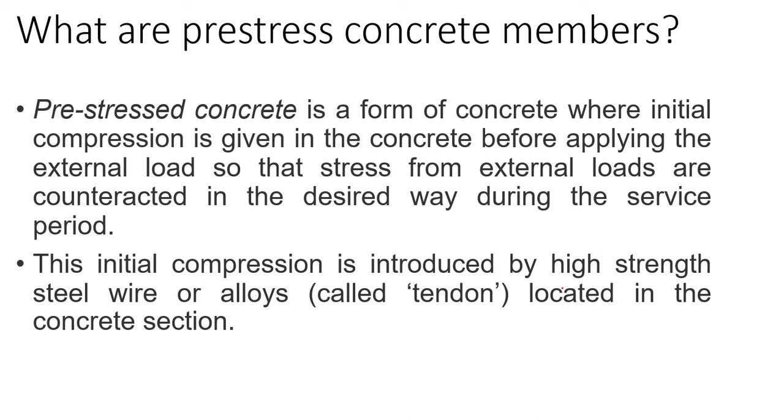This initial compression is introduced by high-strength steel wires or alloys, known as tendons, which are located in the concrete sections. Now, why is pre-stressed concrete required? We know that concrete is good at compression but very weak in tension.

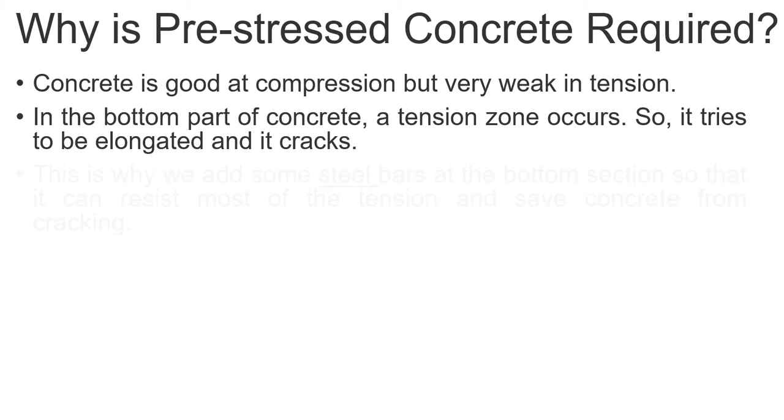When any external load is applied, a tension zone will occur in the bottom part of the concrete. It will try to elongate, and guess what? It will crack. This is why we add some steel bars at the bottom section so that they can resist most of the tension and save the concrete from cracking. This is our traditional RC structure.

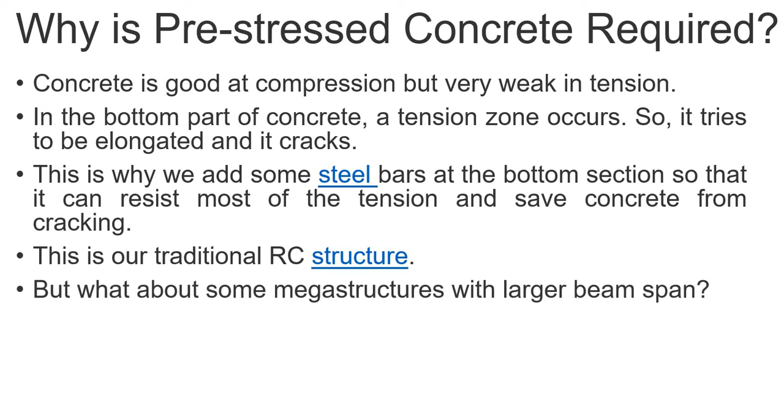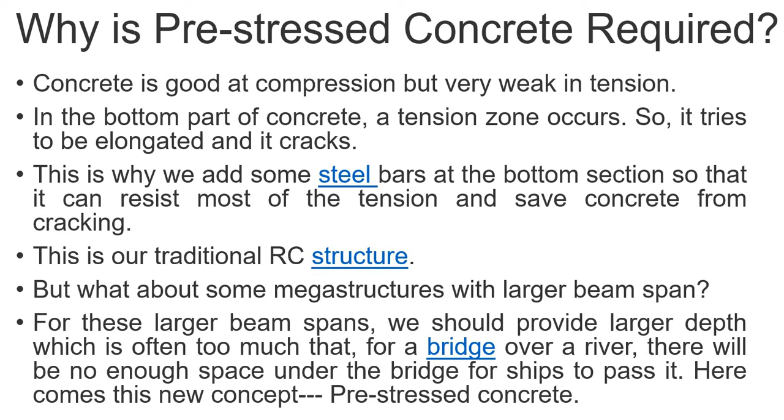But what about mega structures with larger beam spans? For these larger spans, we should provide a larger depth, which is often so much that for a bridge over a river, there will not be enough space under the bridge for ships to pass. Here comes the new concept, which is pre-stressed concrete. So now we understand why we require pre-stressed concrete.

Next, we have to know the methods of pre-stressing, because there are two methods to pre-stress concrete. The first one is pretensioning. In this method, the tendons, or group of wires, are pulled between two end bulkheads prior to casting. This pre-stress is later transferred to the concrete due to bonding. Pre-tensioned concrete members are those in which the tendons are tensioned before any pouring of the concrete. The tendons are initially tensioned and anchored at both ends, and then concrete is poured over them and cured.

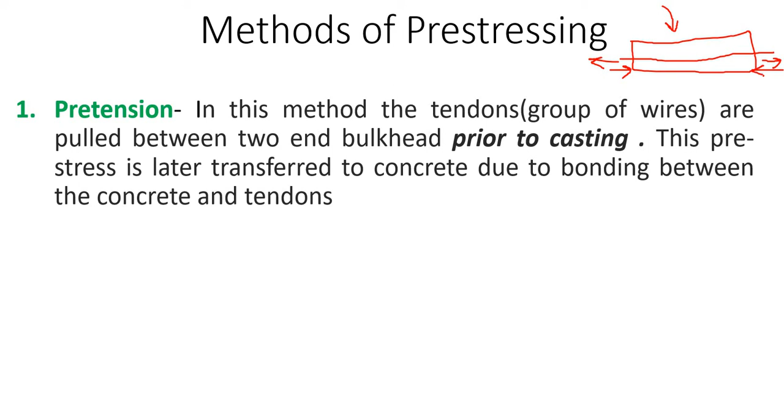Suppose this is a beam, and we have placed a tendon here. In pretensioning, before the concrete is poured and cast, we pull the tendons from both ends, give tension to the tendons and anchor them at both ends. After tensioning and anchoring, we pour the concrete and allow it to cure. When the concrete attains its desired strength, we release the anchorage, and the pre-stressing forces will be developed and act on the concrete. So this is the pretensioning method.

Now, what is post-tensioning? In this process, first the casting of the structure is done and later the tensioning is done, which means in post-tensioned concrete, the tendons are tensioned after the concrete is poured. Unlike pretensioning, where we pulled the tendons before pouring the concrete, in post-tensioning the concrete is initially cast around the sheathing.

Here will be a sheathing. In post-tensioning, the sheathing forms ducts in the concrete in which the tendons are placed. After the concrete is poured and hardened, the tendons are tensioned by hydraulic jacks and anchored. In the case of bonded tendons, the duct is grouted with cement slurry.

So these were the methods of pre-stressing: one is pre-tensioning, one is post-tensioning. In pre-tensioning, before pouring the concrete, the tendons are brought under tension, but post-tensioning is the opposite of that.

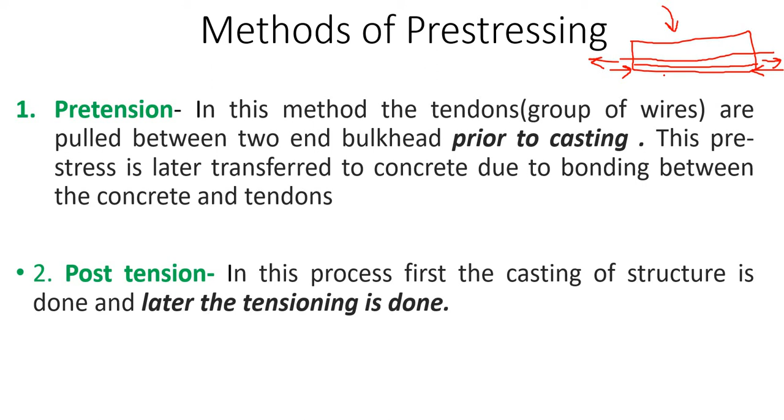Now let's compare RCC and pre-stressed concrete. In an RCC beam, the concrete on the compression side of the neutral axis alone is effective. The concrete on the tension side of the neutral axis is ineffective, but in pre-stressed concrete the entire section is effective. We know that in a beam, the top portion is always under compression and the bottom portion is under tension.

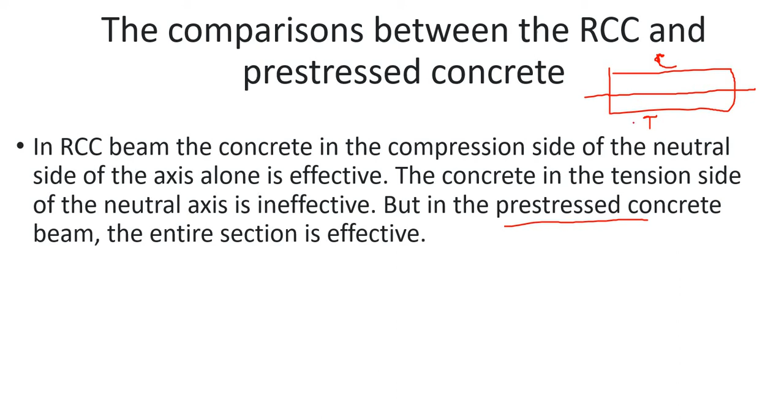In the case of RCC, this is the neutral axis, so the top portion is under compression and the bottom portion is under tension. Since concrete can take compression but is very weak in tension, this part is much more effective than the other. So the concrete on the tension side of the neutral axis is ineffective. But in the case of pre-stressed concrete, the entire section of the beam is effective.

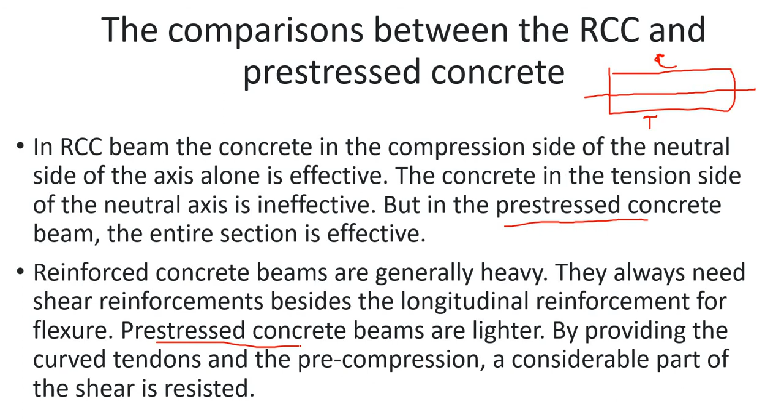Next, reinforced concrete beams are generally very heavy, because we use more concrete as well as more rods. They always need shear reinforcement besides the longitudinal reinforcement for flexure. But in pre-stressed concrete, beams are much lighter. Why? Because by providing curved tendons and pre-compression, a considerable part of the shear is resisted.

Next, in reinforced concrete beams, high strength concrete is not needed. But in pre-stressed concrete beams, high strength concrete and high strength steel are necessary, because we are going to resist huge loads. High strength concrete is needed to resist high stresses at the anchorages, and high strength steel is needed to transfer the large pre-stressing forces which we are going to develop.

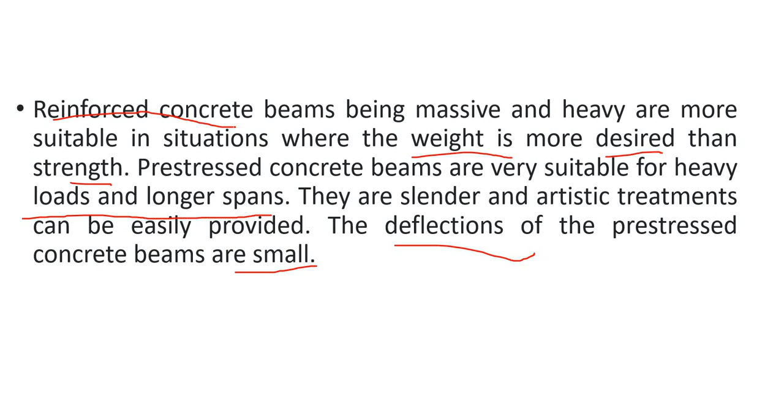Another difference is that reinforced concrete beams, being massive and heavy, are more suitable in situations where weight is more desired than strength. Pre-stressed concrete beams are very suitable for heavy loads and longer spans. They are slender and artistic treatments can be easily provided. The deflections in pre-stressed concrete beams are very small compared to RCC. So we have completed the differences between pre-stressed concrete and RCC.